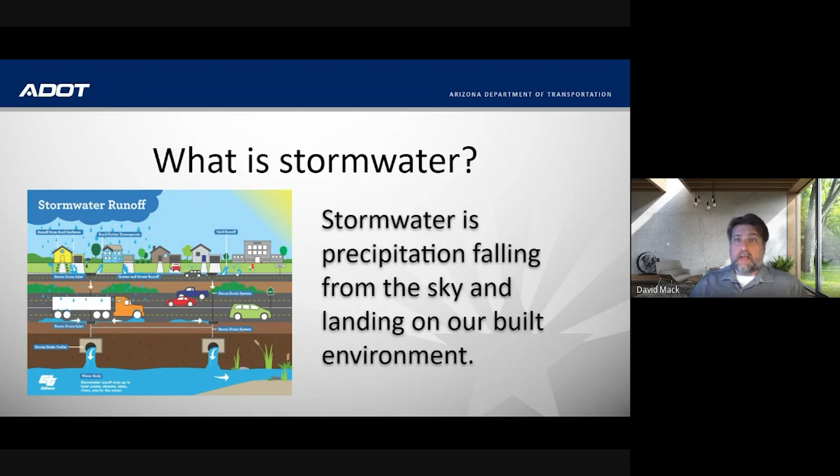Here's a beautiful diagram from Caltrans explaining what stormwater is, and I think it really articulates what's going on when it rains and how water flows over our land surfaces. So now we're into poll question number 2. And question number 2 is: stormwater runoff that enters the storm drain goes through a water treatment plant before being released to the environment. True or false?

Okay, so then I got to hit vote. All right. As the votes come in, since I've never done this before, this is kind of new to me.

I think next time if I would do this, I'd put the Jeopardy music in the background. I think that's very appropriate for this. If you want, I can sing it for you, Dave. No thanks.

All right. I think we have enough votes. False. It is not treated. So those that picked false are actually correct. So we have 2 types of systems out here in the West and in more recent infrastructure. You have a system where you have a storm sewer system and a sanitary sewer system.

A sanitary sewer system is the system that collects our drain water from our sinks, our toilets, our bathtubs, and any other collection systems that you may have in your home or business. And then that goes to a pipe, which is then gravity fed and quite possibly, even in some cases, pumped up to a treatment plant where it is treated, it is cleaned up, and then it is discharged into our waterway system.

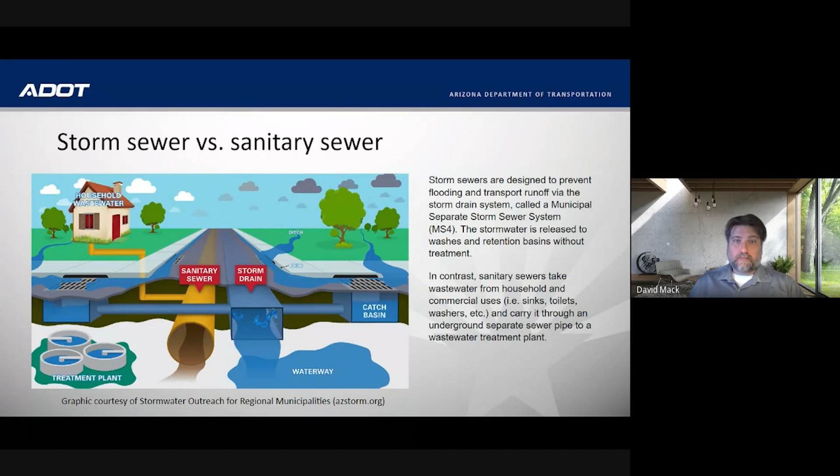There are 2 main impacts of stormwater on our systems, and the first one is water quantity. A flooding event is a water quantity event where we have too much water impacting our system. We've seen that recently in California with their wet winter, and we've seen it here at ADOT where we've had underpasses flooded. Basically, too much water is coming into the system, and debris and sediment left on the road is getting into our drainage system, which is preventing the pump houses from working. So then we get flooded underpasses and sometimes stranded people, and then we get on the local news, and it's a fun time for everybody who has to deal with that.

That's a quantity issue. Here in stormwater, we actually deal with water quality. We want to make water as clean as possible using control measures that we have in our program before it even gets off our site, so that when it gets discharged, it's as clean as possible. So we're dealing with the quality of the water.

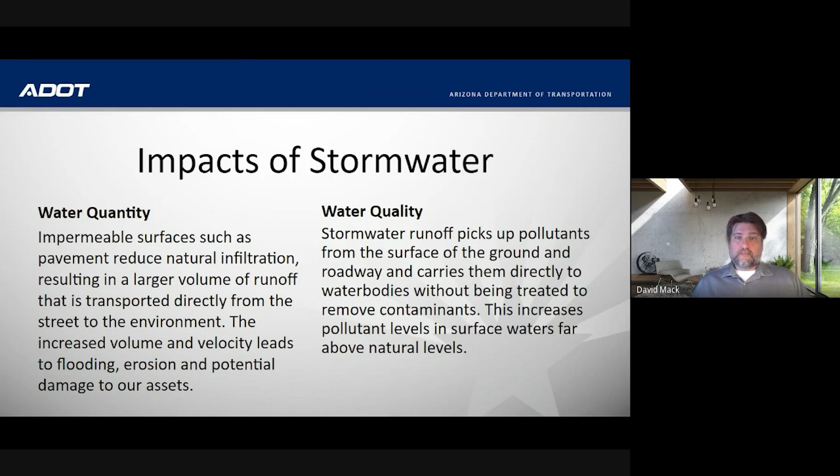So when the storm hits and the water runs off properties, it runs into a publicly owned conveyance system called an MS4, a municipal separate storm sewer system. That public conveyance consists of curb, gutter, drains, and then eventually pipes, which go to a waterway. Pretty much all cities and counties in Arizona are regulated as an MS4. ADOT is no different.

However, our system is a little bit different because it includes all of our statewide network and associated facilities such as maintenance yards, ports of entry, MVD offices, and any other properties we own. That whole system, our curbs and gutters and catch basins, is our stormwater system, and that's what we're trying to make sure is in good shape.

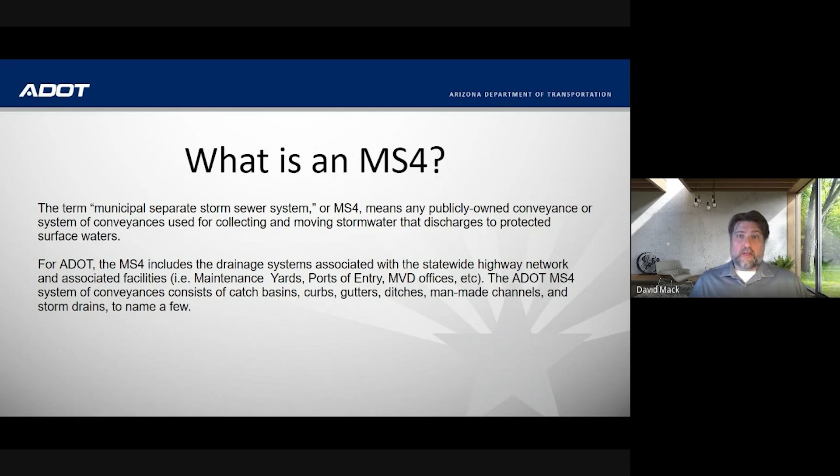So the way that happens, these publicly owned conveyance systems, or MS4s, are all regulated by a permit system. And that permit system is regulated by the EPA and then delegated to the states. The state, in this case Arizona Department of Environmental Quality, dictates to us a permit that allows us to discharge stormwater to protected surface waters in accordance with the permit requirements.

Now, the permit that we are currently under has been effective since July 1 of 2021. We have been under a stormwater permit managing our operations since the late 90s, approximately 1998, when we had our first permit issued by the EPA. Then in the early 2000s, around 2001, 2002, 2003, I can't remember the specific time, we transitioned to an ADEQ permit. And since then, we've had 3 ADEQ permits, culminating with this one being our latest. So for over 20 years, we have had a permit dictating our stormwater discharges.

So the permit is filled with a lot of technical jargon and a lot of information, both state and federal regulations. As such, those regulations are very cumbersome to work through. Both Laura and I work through them. We try to decipher them. We reread them over and over. But what it comes down to is that we truly need a game plan to make sure that we're effectively managing it. And this is where the SWMP comes in, the Stormwater Management Plan. This is our game plan for ADOT, an in-between from the permit to how we're going to implement things in the field.

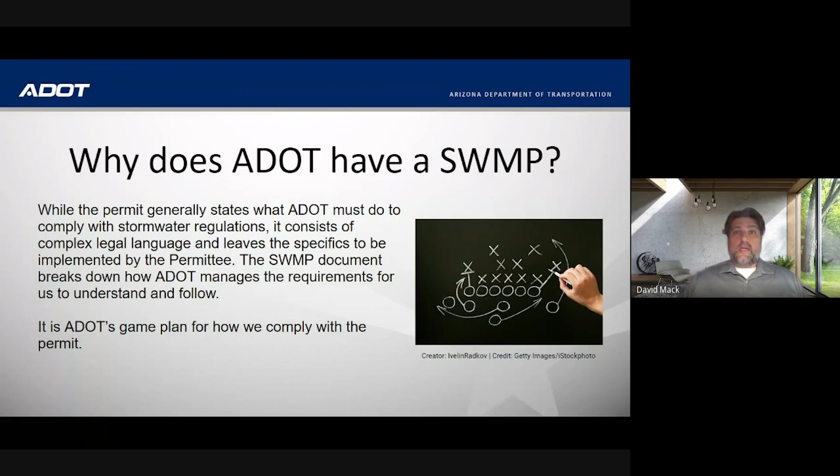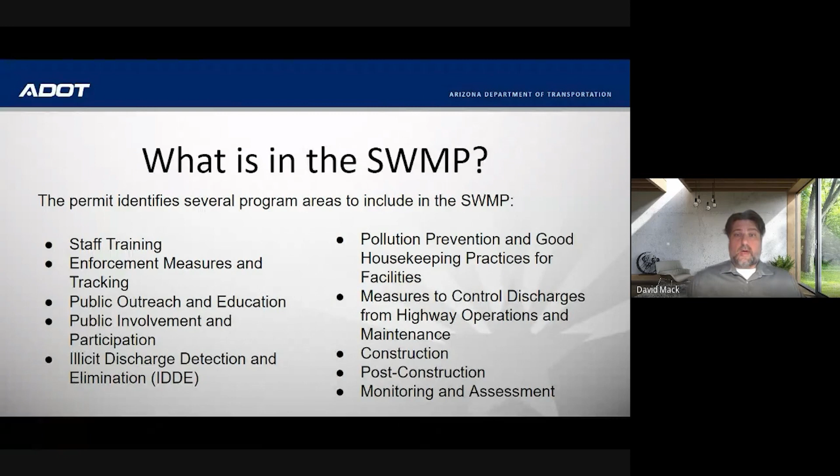The SWMP consists of these 10 areas that are covered in the permit that we have to talk about, that we have to manage. And through that, the SWMP dictates what we're going to do in each one of these sections. I'm not going to go over these sections in detail. There's just a lot of information in each one, but in further presentations, we'll cover some of these in greater detail.

The SWMP, like I said, is our game plan, but when the elements of the SWMP are implemented, they are expected to prevent pollution from being discharged into receiving water bodies from our facilities and our activities. And truthfully, the main goal is to protect water quality, satisfy applicable surface water quality standards, and preserve Arizona's precious water resources. I believe using it as part of our local water supply, some way, shape, or form, is potentially an inevitability. So the cleaner we can make it and the better we can treat it, the better it is going to be for us in the future.

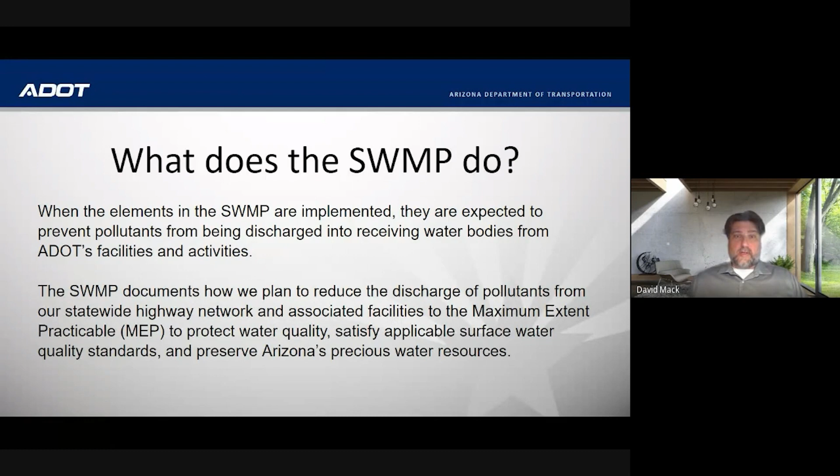Now, when we write the SWMP, we have 4 principles that both Laura and I live by: what needs to get done, who needs to do it, when it needs to get done, and what records need to be kept. These are the 4 main principles we try to write the SWMP by. And we have to review it annually to make sure that the program is up to date and is working with ADOT and ADOT standards. So we're constantly revamping it too.

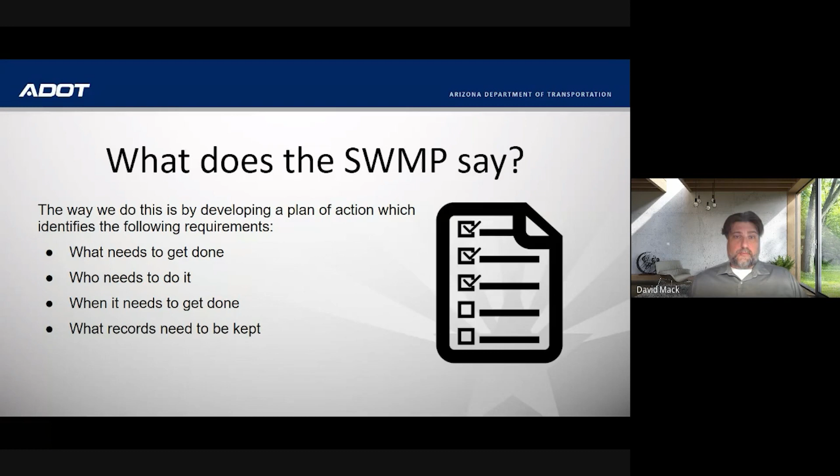So how does it affect us here at ADOT? Well, as ADOT employees, it means understanding our stormwater program and participating in ways to reduce pollution from entering our storm drain system. Maybe it's just picking up stuff in our yards and cleaning up after we do work on the roadways. Maybe it's making sure we keep our goods where they belong, reporting spills as we need to, whatever it is, as long as we all are doing the same thing and making sure that we're not discharging stuff into our storm drains and impacting people downstream.

Other things that we can do are ask questions, participate in training sessions such as this, and become familiar with our control measures or BMPs, best management practices, in our manuals and other ways that we help to protect stormwater quality.

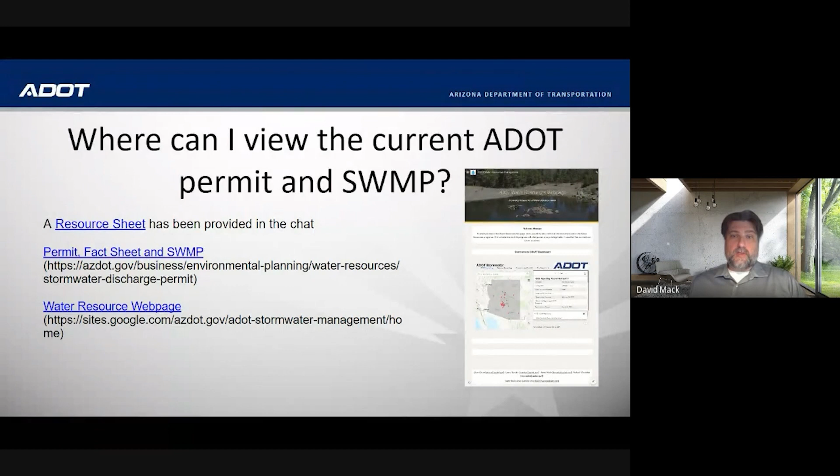So we have this permit, we have this SWMP, we have this program. Now we have to do a check on the program to make sure that we're actually doing what it says we are doing. We say we're going to do this. We now have to prove that through monitoring. And we have a very robust monitoring program.

We've been collecting stormwater samples from our roadway and maintenance yards for approximately the past 15 years. And the purpose of that, as defined by the permit, is to characterize stormwater quality and identify stormwater pollutants, detect and eliminate illicit discharges, and to basically evaluate the overall effectiveness of our control measures and/or BMPs that we employ to keep stormwater as clean as possible.

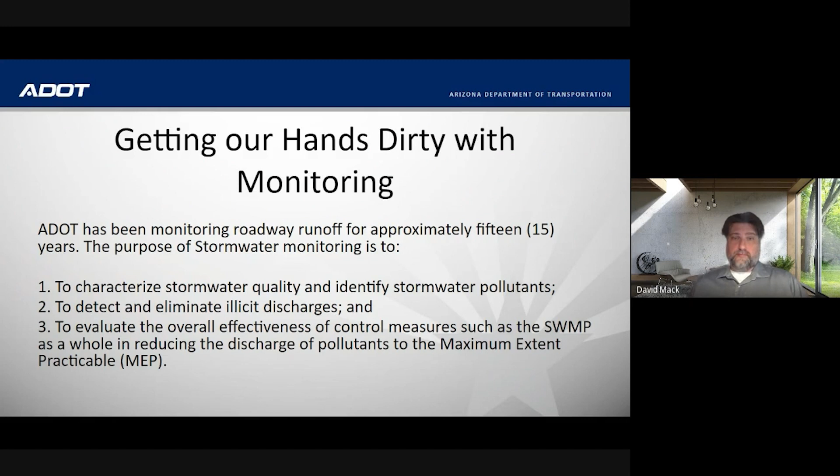Well, where did that dust go? It went down to the ground. It went onto our roadway. When that rain hits our roadway, it's also picking up other things, such as vehicle deposition. When you get a moment, next time you're driving on the road, look at the other vehicles around you. What stage of decay are they in? Are they brand new and look great, or are they old and dirty? What's the condition of your vehicle?

Are you leaking oil, antifreeze? What are the trucks on the road? Do they have secure loads? Is stuff flying out of the back of their trucks? All these things contribute to pollution on our road, which when it rains, comes off our road. There is also our activities too. So in the north, we do sanding and salting activities because of the winter weather. That gets left on the road. Next time it melts, it goes with the stormwater off-site.

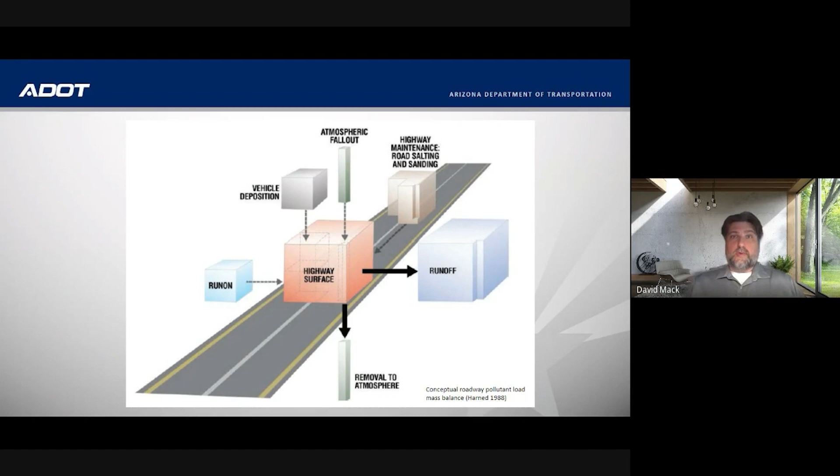That's the point, that if we implement the SWMP as best as we can, and we're doing everything we can do, that's where I'm monitoring, and that's where we're hoping that the results I get from that are low and below surface water quality standards, and we're doing a good job. That's where we're testing, at that runoff point.

The monitoring requirements are established in our permit and reiterated in our SWMP. And basically what they state is, when is sampling required? How often do we sample? Where do we collect the samples? How much do we collect? And what do we test for? And we're going to talk about some of that right now.

We are required per our permit to sample one time per season. And the seasons are defined as a summer season from June 1st to October 31st, and a winter season from November 1st to May 31st. So I am required to collect one sample in the summer and one sample in the winter. That's it. That's all I do.

I spend a lot of time working on this with consultants to make sure that we collect those samples. Sometimes it doesn't go perfect. Sometimes I have to collect 2 or 3 samples in that time frame to make that one sample, but we get it done as quickly as we can and as early in the season as possible.

We sample 5 roadway locations and 2 maintenance yards. Our roadway locations are Flagstaff, Sedona, Phoenix, Tucson, and Nogales. In Nogales, we also sample the maintenance yard because of its close proximity to Nogales Wash, and the Superior Maintenance Yard because of its close proximity to the Queen Creek.

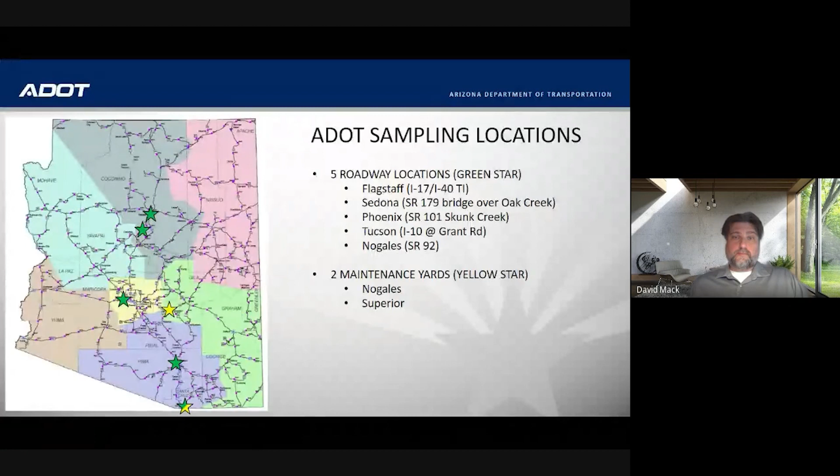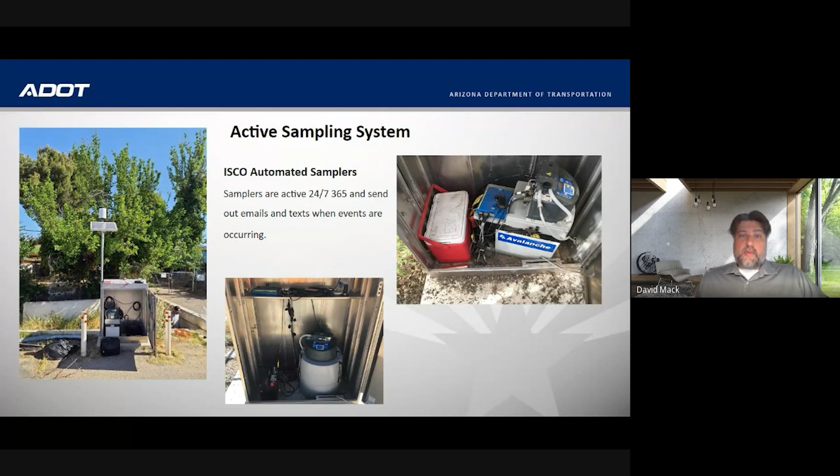We can't get to it in time because of how far away they are from Phoenix and Tucson. So we have refrigerated units, while in Tucson and Phoenix, we actually do not at this time, but we are changing that. And so what ends up happening is that inside these 2 units is a 9-liter bottle where we collect all the sample. And then what we're sampling is our storm drain system.

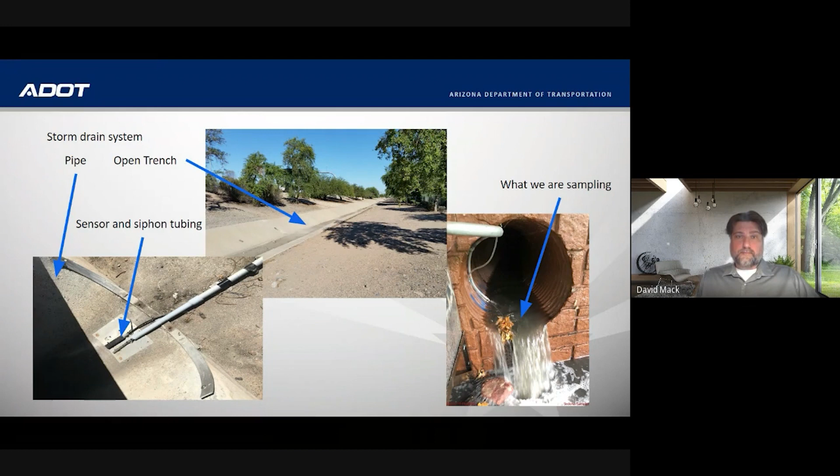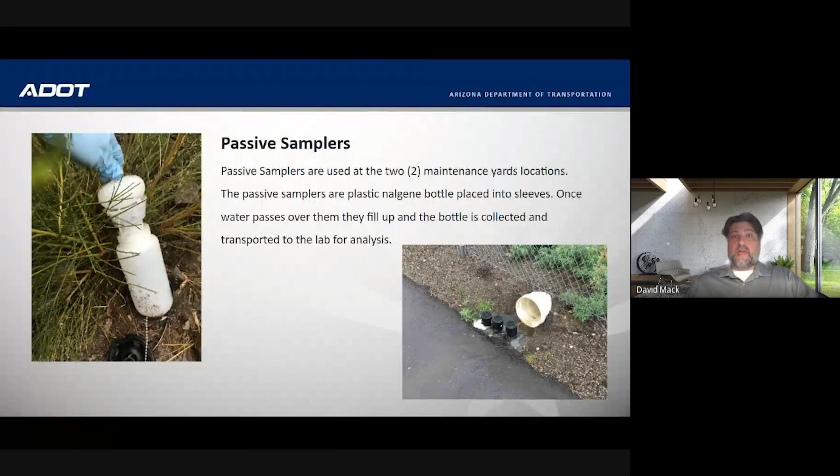In our maintenance yards, we use a passive sampling system. Basically, they're Nalgene bottles, and they're placed in the ground. Water passes over them, they fill up, then they get stopped with a stopper, and then we just pull them out of the ground after the storm event, put them on ice, and send them to the lab. Same with the auto samplers: we take the 9-liter bottle out, we put it into its respective bottles, and then we take it to the lab for analysis.

When we actually take it to the lab, we're asking the lab to look at a lot of these parameters, such as total dissolved solids, total suspended solids, nitrates, nitrites, organic toxic pollutants, such as polyaromatic hydrocarbons, which is basically a list of hydrocarbons that can be found in water. We're also looking for E. coli and various metals.

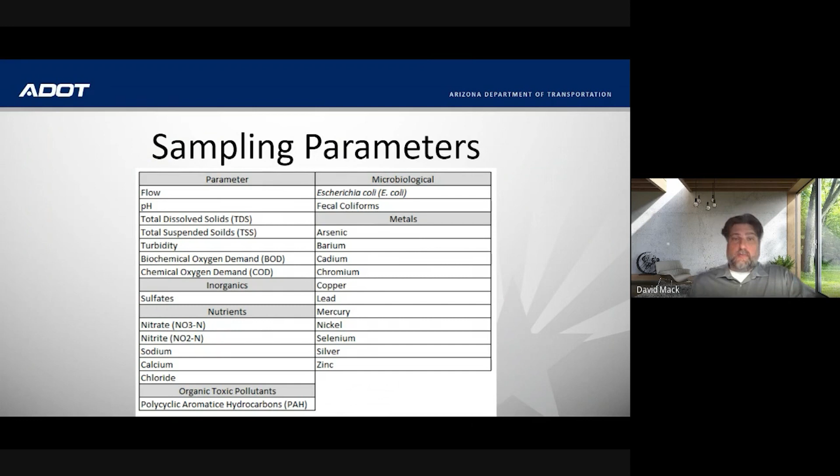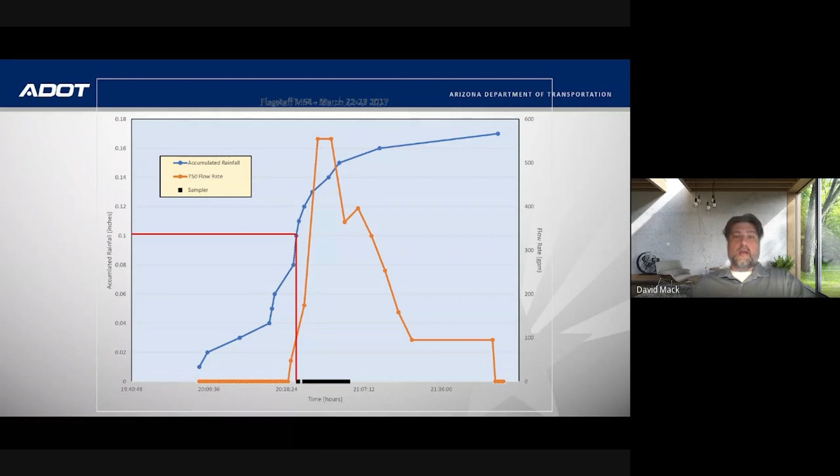And so what we end up doing is we capture that sample, we send it to the lab, and this is our flow-proportional composite sample. When we collect this early in the season, this is usually the dirtiest water that we have. If we were to collect water after this and compared the two results, it would be much cleaner. But we are required to collect this at the first flow because we want to collect the dirtiest water, because we want to make sure that our BMPs are working.

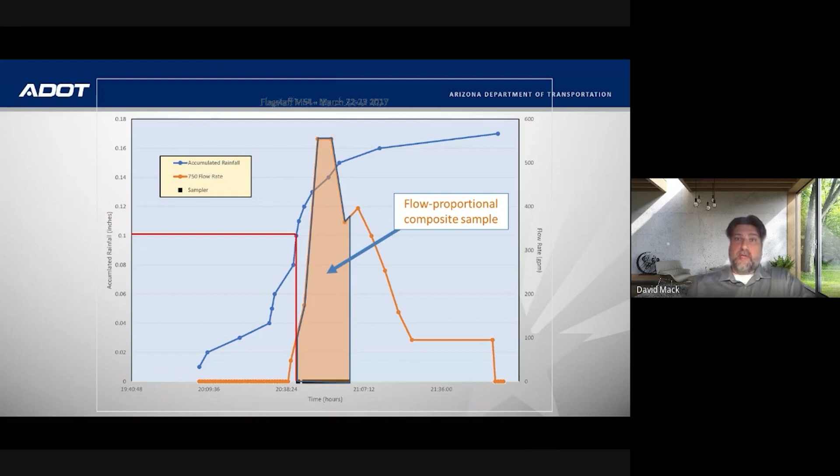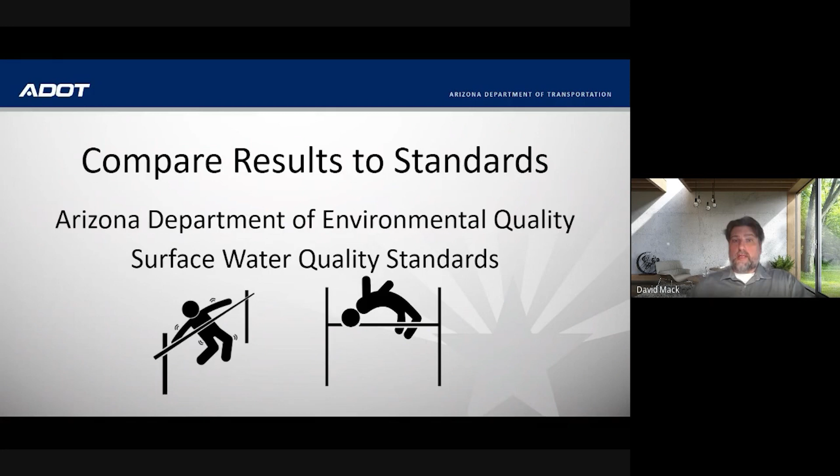Once we get the results back from the lab, we then need to compare those results to standards. So the first one we compare them to is Arizona Department of Environmental Quality's surface water quality standards. Now, since this part of my presentation is part of another presentation that I give, we've actually got some additional data that we've compared it to.

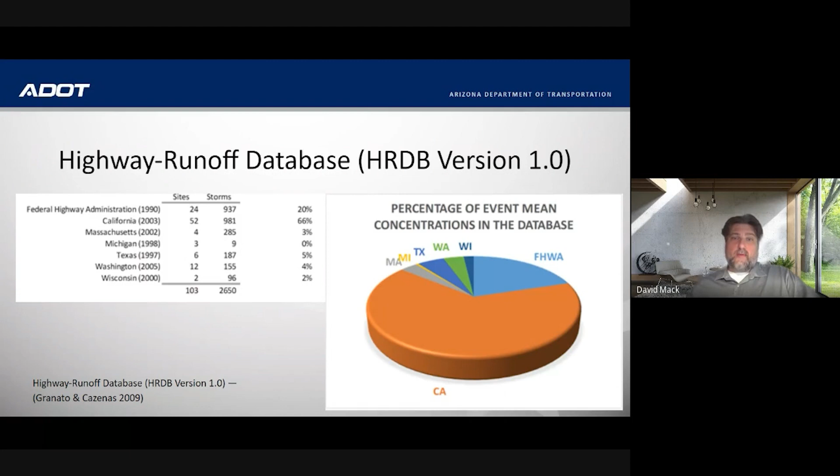And the first one that we've compared it to is the Highway Runoff Database, which is managed by the USGS. Basically, what's going on here is that the USGS put a call out and has asked DOTs across the nation to submit their sampling data. And so we can query that database as a DOT and find out what other DOTs are doing and compare our results to their results. And so, as you can see here, it's very California dependent, but it's got some very good information in it.

We've also looked at the City of Phoenix's data because their data is available, and they have about 20 years of monitoring data just like us. And so they're a very robust system too. So we can now also make sure that we're comparing to something more local.

Now, copper in general is just a very important element to Arizona and Arizona's economy. We have a lot of copper mines, and we have a lot of places where copper is just naturally abundant in our soils. We also use copper, and copper is one of the reasons why I'm able to present to you from my house to your house using all these wonderful computer systems that we have. So copper is very ubiquitous in our daily lives too. We even coat it on pennies.

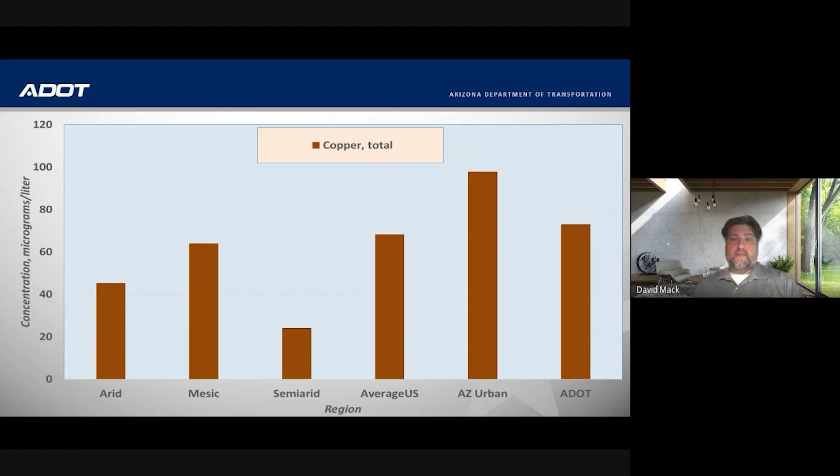So what we're seeing here is that we're very comparable to DOTs, and we're also comparable to the City of Phoenix. And when we compare it to the surface water quality standards, we're way below, sitting at around 70 micrograms per liter, while the standard is set at 500 micrograms per liter. So we're way below it. So we're doing really good with copper.

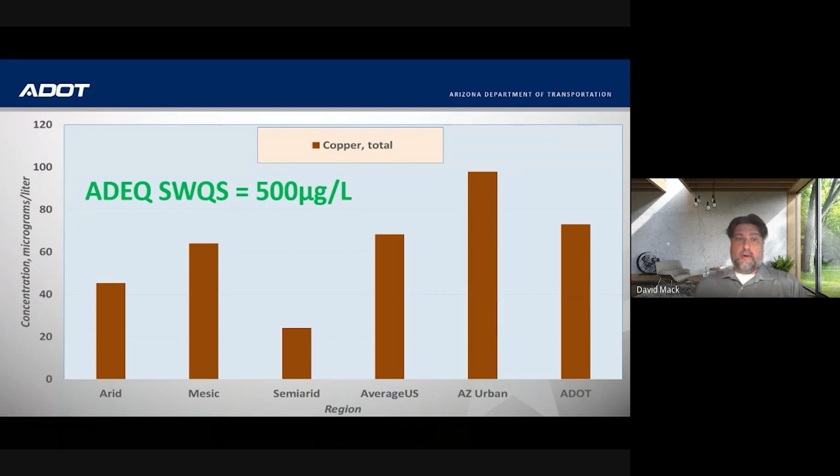Another result we look at is TSS, or total suspended solids, and TDS, total dissolved solids. In order to think about total suspended solids versus total dissolved solids, let's think about a snowplow. When we're plowing the road and we're putting salt and grit on the road for traction and to destroy the ice and make it less slippery out there, that salt gets dissolved in the water and we can't see it. So that becomes a dissolved solid. But that grit, if it gets washed out in the stormwater, becomes a suspended solid.

We can see it. If you remember back a couple slides, I had that picture of the discharge going through Sedona. You notice that the water was not clear. That's because of the suspended solids. Suspended solids for us are usually things such as soil particles and other types of gross particulates in the water column that are just readily there.

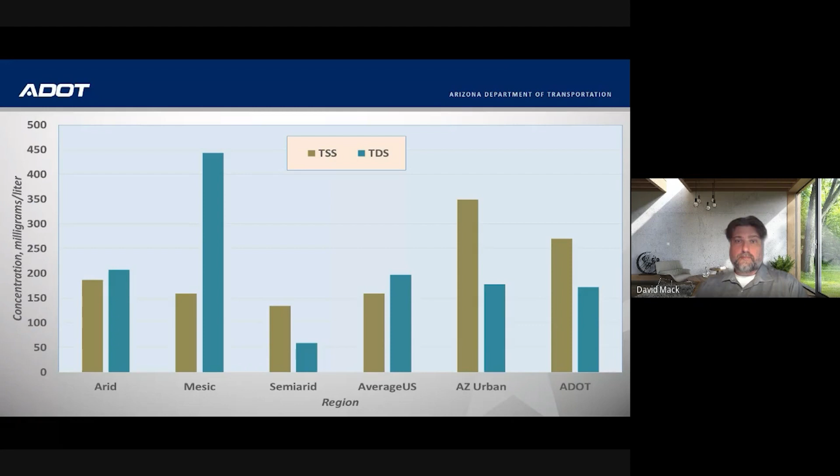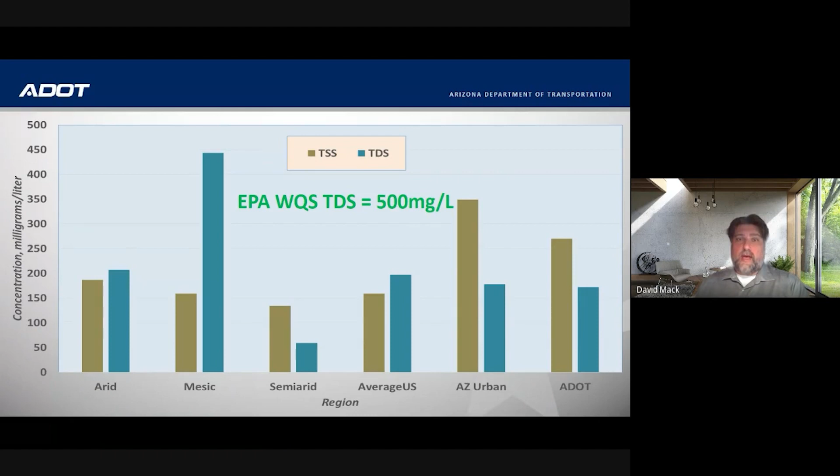And then when we compare them to the surface water quality standards, again, we're looking at 500 milligrams per liter, and we're sitting below that for TDS. So we're doing really good. So for a monitoring takeaway, we've been collecting data for 15 years now, and we have a lot of data and a lot of information. With that, what we're seeing is that we're on par with other DOTs across the nation. But we still need to do further research, and we're about to finish a research project where we've actually tackled some of these questions about what specifically is in our right-of-way that is causing some of these impairments in our runoff. So hopefully in the near future, we can present you that information.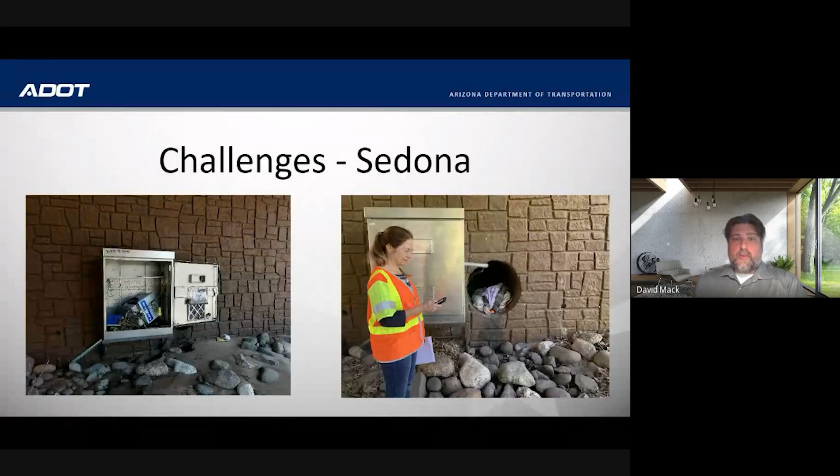Luckily, we were able to grab samples, and we pulled everything out and put it in the box. So now all we're doing is just recording the rainfall events in that area. But it's a problem that we're seeing all over the place. In Tucson, we've had this situation where I had my Tucson sensor. We were picking up a lot of rain, but we weren't picking up any samples. So we went out there and investigated, and we found that the sensor, again, that black box, had about 2 feet of debris on top of it from the pipe.

And so then we went to the other side of the freeway, and this is I-10 at Grant Road. This is right off the frontage road, and off of our fence line is the railroad that goes through Tucson. And what ended up happening is we saw this. So what must have happened is that a storm event happened. The pipe collapsed, that black pipe in there collapsed, and all this sediment dislodged from the slope here and then traveled down the pipe and buried my sensor.

When the Tucson East unit was able to finally repair this, they looked at it, and what they believed happened was that the homeless must have gotten into the trench that's right there and started a fire in that pipe. That pipe is made out of plastic, and fire and plastic don't really mix, and they must have caused a situation where the whole pipe just collapsed during a storm event.

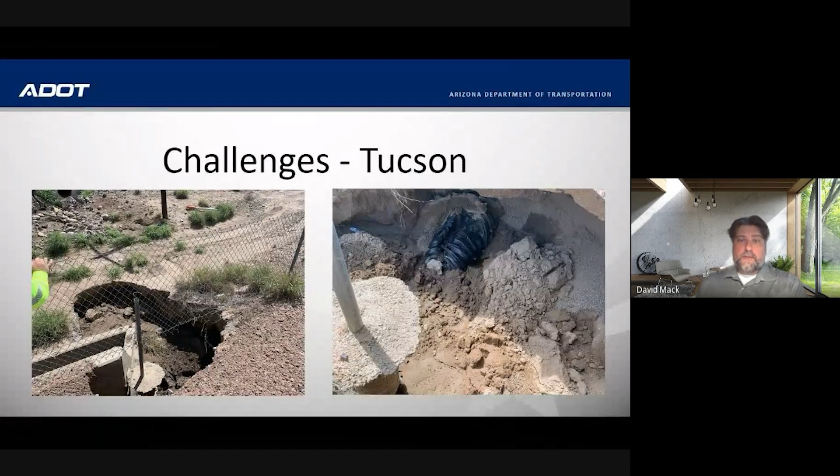In this same area, it's a drop inlet structure. So what ends up happening is that since the railroad is patrolled, but not heavily patrolled, and there's a lot of homeless that use it as a transportation corridor, they end up throwing a bunch of their stuff into this trench, which then contributes to gross pollutants in our waterways, such as the Santa Cruz River, and also creates situations where my monitoring is excessively high due to the pollution there, and can also damage my sensor.

We went and we cleaned out this trench, and we found needles. We found about 10 hard drives, clothes, wrappers, food, things like that. Everything you can expect from the homeless population. However, the hard drives were very interesting to find. And I have to spend money pretty much twice a year to make sure that this area is cleaned out prior to the sampling season so I can get samples as clean as possible. And we're starting to see this in other places too.

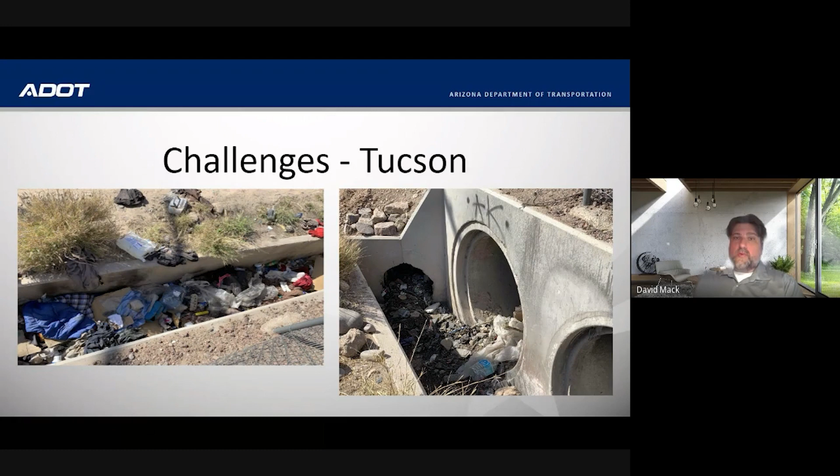So that's our stormwater program in a nutshell. But in closing, we have a pretty robust stormwater program, and our purpose is to preserve Arizona's precious water resource. If everybody at ADOT does their job, we can protect stormwater and make it as clean as possible. And finally, remember, one of the slogans we use in our stormwater program is "Only rain in the storm drain."

We want to try to keep Arizona's precious resource as precious as possible and as clean as possible. If we all do our part, clean up after ourselves, maintain good housekeeping, and make sure our system is working functionally, we're doing our part, we're doing our job, and we're going to have good stormwater discharging off our properties.

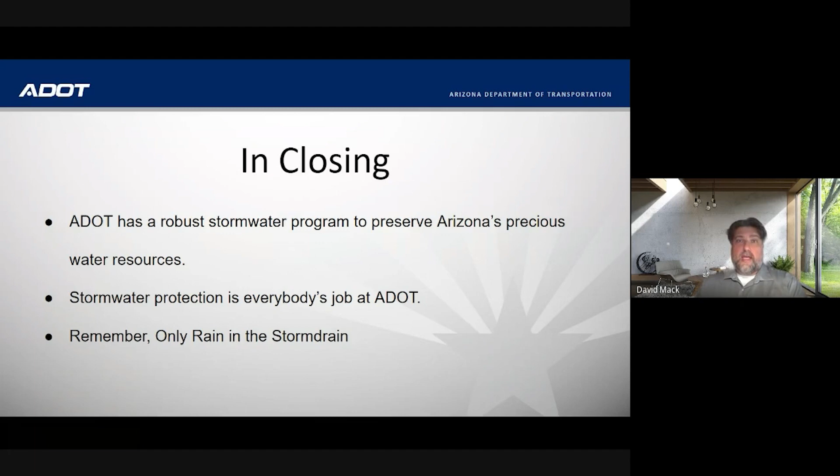We have one question from Lynn at around 11:40: what do you do with the sediments that come with the stormwater? The sediments tend to just flow through the system, and we don't really pick them up unless they're impacting, and then we can get crews out there to clean up. But most of the time, we just let it pass through the system. One of the ways we can prevent it from getting in the first place is working with street sweeping and getting sweepers out to clean our curb and gutter system before storm events.

But we have a lot of lane miles and a very limited amount of sweepers. So each maintenance unit needs to prioritize their areas. But if we could clean up that area beforehand, it wouldn't get into the system. We wouldn't have to come back in and vac out those drains, and we can keep the system as clean as possible and flowing.

David Prophet commented the final report for the stormwater study will be out in the next month or so. I don't know if it'll be out in the next month, but I'm working with the consultant to gear up on a presentation. So I'm hoping that'll be out in the next month or two. And once it is, it will be available on our website for everybody to read. And then we will present the information to Lunch and Learn in the near future.